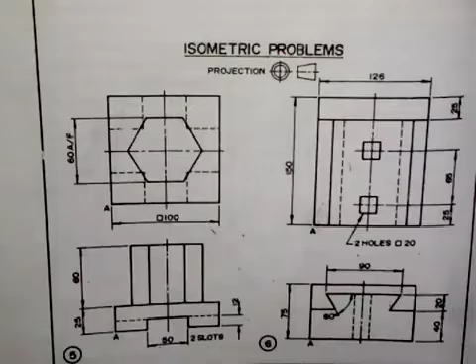Alright, here we are still working on isometric problems, and here I will be showing you how you can construct this, how you can produce the isometric view of this object. And actually, the book I'm holding is Engineering Drawing 1, Pickup and Parker, and I'm on page 166.

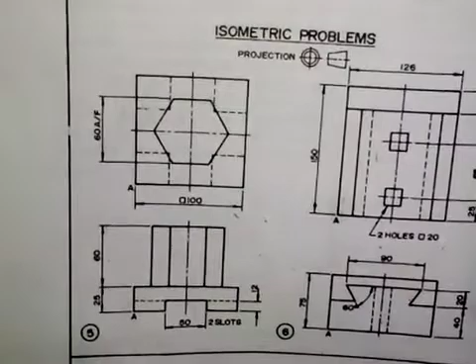And here we have these orthographic views. They are given in third angle projection. It means that for this object that I said I want to produce its isometric view, we have this is the front elevation, and this is the plan or the top view, and this is the front view. Okay. As I said, we want to produce the isometric view of this object, and looking at what we have here, let's talk about the dimensions.

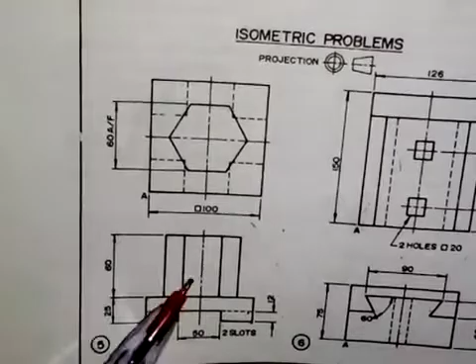So we have in the front elevation, distance from here to here is 12 millimeters, and distance from here to here is 50 millimeters, and then for this distance from here to here is 25 millimeters, and the height of this is 60 millimeters. And if you look at what we have here, this is a hexagonal prism placed on this body. Okay, then coming to the plan, for this hexagon that we have here, the distance across flat is 60 millimeters, and distance from here to here is 100 millimeters.

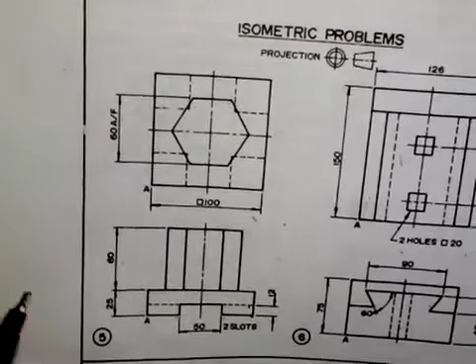So for this base, we have two slots as it is written here. There are two slots, and distance from here to here is 50 millimeters. So that means we have one on this side and one on this side. As you can see here, it is hidden here. So first of all, the first thing I'm going to do is to produce the base. And the base is in form of a square. So I will produce that and you will see it right now. So let's work on that.

So the first thing that you need to do here is to draw a horizontal line. So we draw a horizontal line like this, and we take our set square. Okay, so we take our set square, put it at this point, and we draw this line in this direction. Okay, and then we turn it to this side, and we draw this in this direction like this. Okay, so as we have done now,

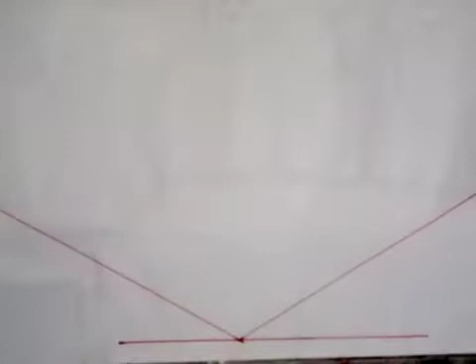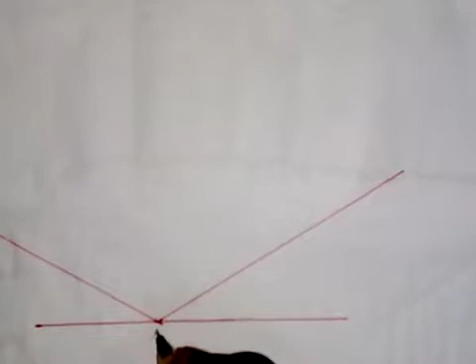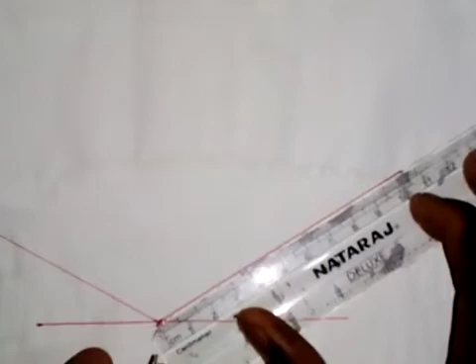looking at what we have here, we are told that this is point A here. So if point A is here, that means I have to take a measurement of 100 millimeters at this point. So this is 100 millimeters. And I also have to take 100 millimeters on this side, because this is a square. So this is 100 here.

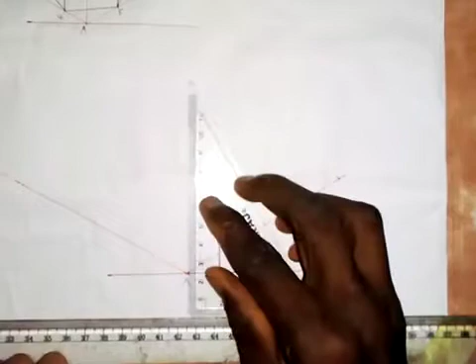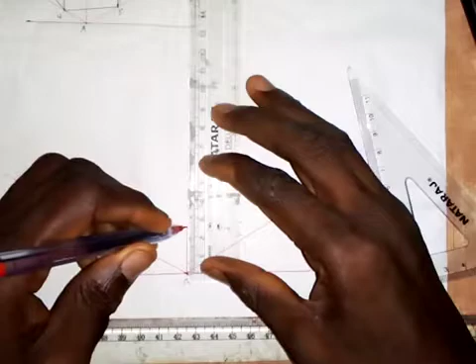So here I'm going to draw just a short vertical line at this point like this. And in the drawing, the distance from here to here is 25 millimeters. So here I will take a measurement of 25 millimeters. So this is 25 millimeters here. So here I will draw this line. Here also I will draw a vertical line, and I will come here also and draw a vertical line.

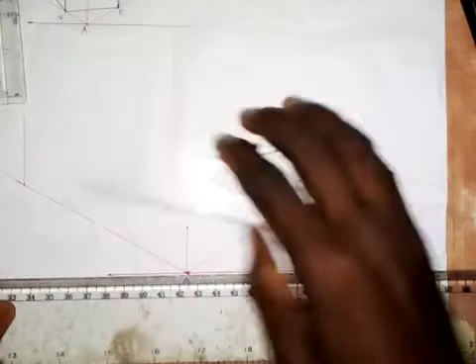So here I will transfer this to this side, and this also will be transferred to this side, and then here I will draw this. So take this to this side, and here I will transfer this to the other side. So this is it.

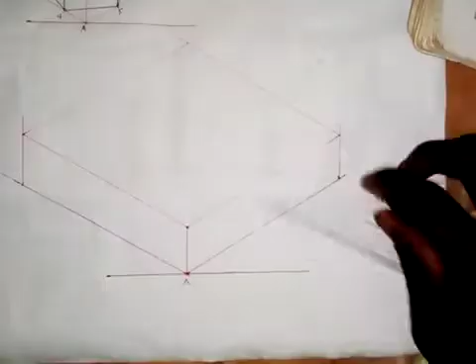Okay, now we are not done with the base, because we are told that we have slots here. We have a slot on this side, and we are told that we have two slots, so that means we also have it on this side. Since distance from here to here is 100 millimeters, I need to get the midpoint of the whole of the body, so I will divide 100 by 2, that is 50. So here I have 50, and from here I will take 25 to this side, as the length of the slot is 50 millimeters.

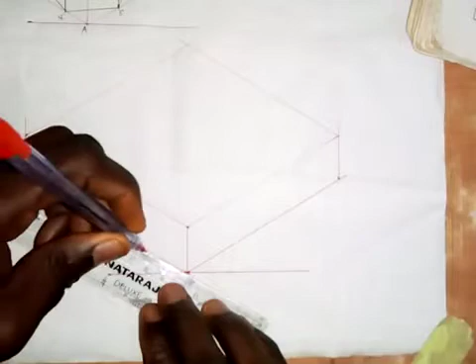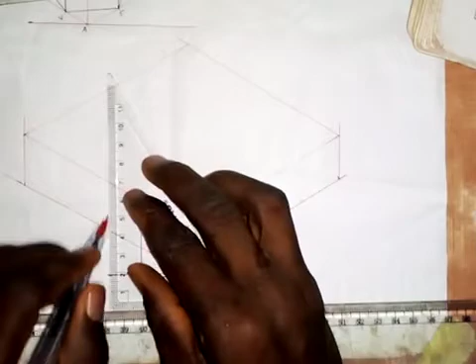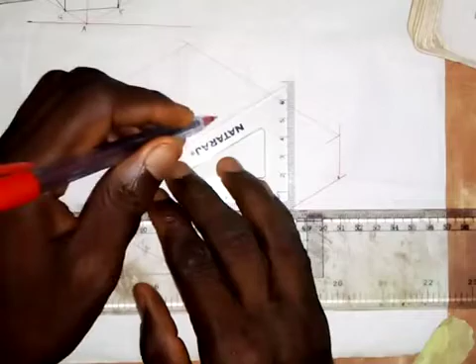I will come here also and get the midpoint of this. So this is 50 millimeters. I will take 25 to the right side and 25 to the left side. Okay, so with what I've done here, let's locate the center first. The center is very, very important. So I will draw the center with a short dashes line. I will also come here and do the same thing. So I will transfer this to the other end like this. I will also transfer this to the other end.

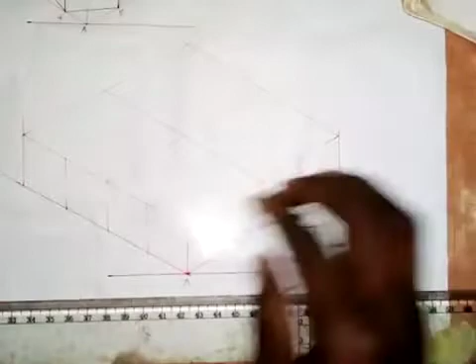Alright, so I've located the center. So the next thing I need to do here is to get the slot drawn. So here I will draw a vertical line. Here also I will draw a vertical line. Here I will also draw a vertical line at this point, and here also I will draw a vertical line at this point. Then at this point, I will draw a line in this direction, and here also I will draw a line in this direction to this side.

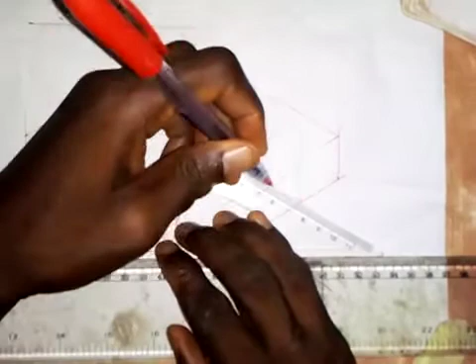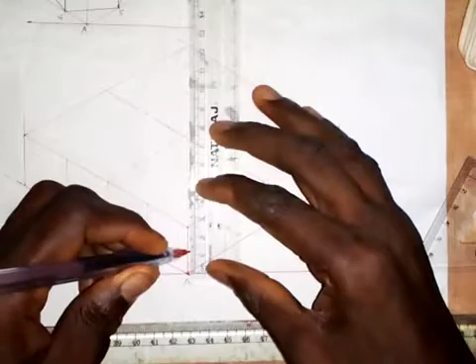Okay, so with what I've done here, what is the height or the distance from here to here? The distance from here to here is 12, as we are told there. So I will take a measurement of 12 millimeters on this line. So this is 12 millimeters here. So here I will transfer this to this side like this, and here also I will transfer it to this side like this. Okay, so looking at what we have here, we have the base in place, we have the slot in place. So let's leave it for now.

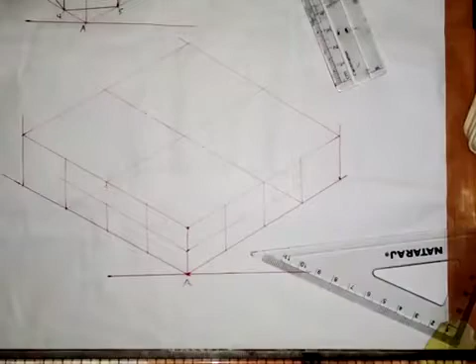So the next thing that we are going to do is to produce the prism that is placed here. To produce the prism, we are given distance across flat. So distance across flat is 60 millimeters. So what I'm going to do is construct. I will come here, and I'm going to use this part. So for you to be able to see what I want to do here, I need to construct a hexagon using the distance across flat. I've done a video on that, so all you need to do is to watch the video. But if you have not watched the video, I'm going to do it here for you to understand.

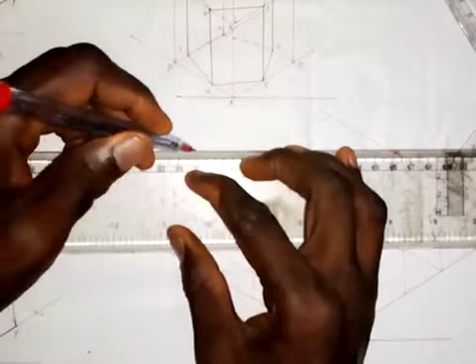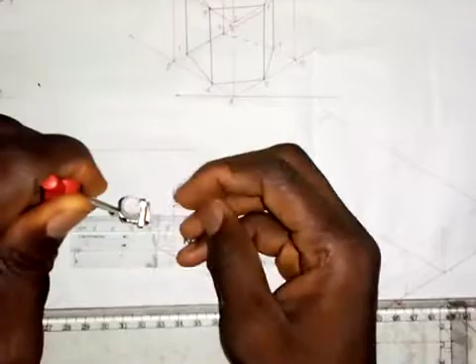So I will draw a horizontal line here like this. With this horizontal line that I've drawn, the next thing I'm going to do is to take my compass and draw a circle here. All right, so here I will take a measurement of 30 millimeters as the radius, as the distance across flat, as we are told here, is 60 millimeters. So I just take a measurement of 30 millimeters. So as I've taken it here now, this is 30 millimeters. I'll put it somewhere here, and I will draw a circle like this.

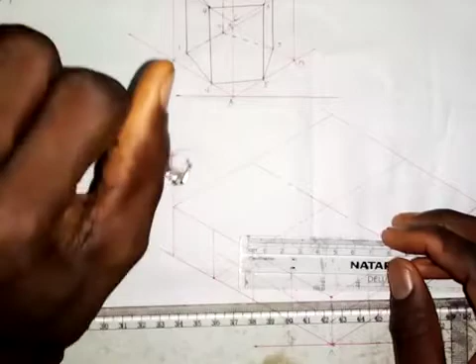So with this circle that I've drawn, the next thing I'm going to do is come to this point here. It is distance across flat that we are given, so we construct in this form. You draw a horizontal line at this point, that's the tangent to the circle. You also draw a horizontal line at this point like this. Then you take your set square and set it at this point. You set it like this, and you draw a tangent to this part here like this, and also bring it to this point like this, and you draw a tangent to this like this.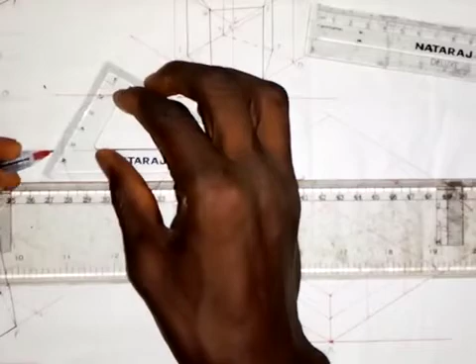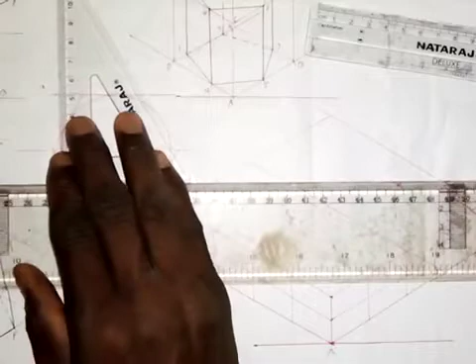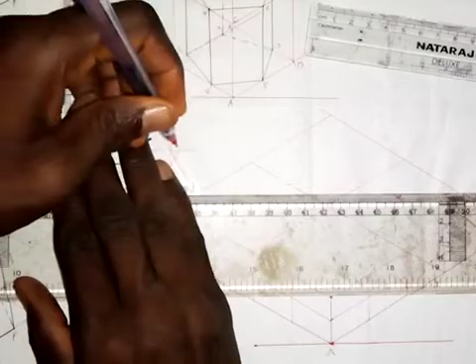Then if I set it like this, I will draw a tangent to this point like this, and then bringing it here like this, I also draw a tangent to this. Okay, so I draw like this. Looking at what we have here, all I need to do is make this thick. So make this a thick line from here to here. I also make this a thick line from here to here, and this a thick line from here to here. So this will also be a thick line.

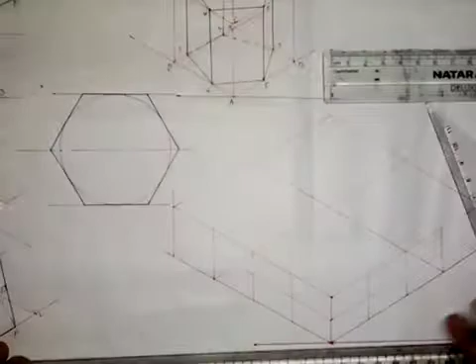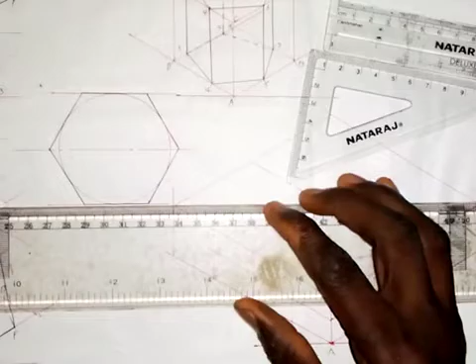And this will also be made a thick line for the hexagon to come out, for us to be able to see the hexagon. So this is it, we are drawing the hexagon. By drawing a line from here to here, the distance from here to here is known as distance across flat. I believe you understand that. Okay, so the next thing that I'm going to do here is draw. I can just use one part, because I don't want the line to cross this object. So I will draw a vertical line.

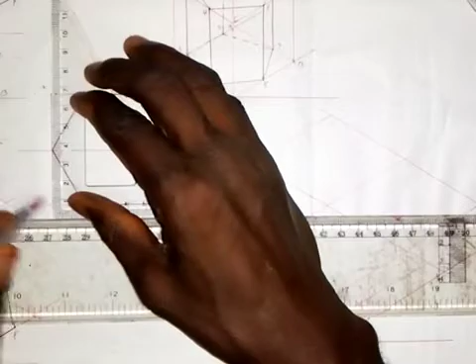Draw a vertical line here. I draw a vertical line here, and I don't want it to cross this, so I can make use of this part alone. So what I want to do is that if I draw around this, I'm going to get something like that, a square. Yeah, that would give me a square. That's what I want to get here.

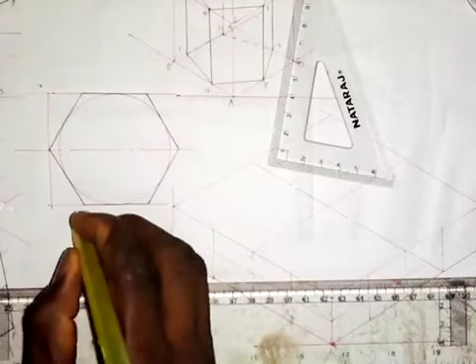But before that, let me label this. So if this is A, or let me draw it. So let me draw it. If it crosses it, I'm doing it with a thin continuous line with my red pen. So if it crosses it, I don't really need it. So I draw this like this, and I will draw this horizontal.

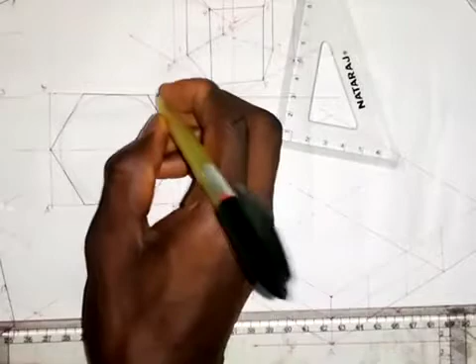Okay, so this is point A and this is point B here. This is point B, so don't mind that. So this is point C here, and this is point D. So here I will label this. This is 1, this is 2, this is 3, this is 4, this is 5, and this is 6.

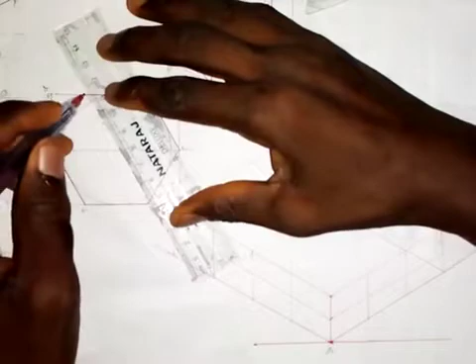So I will need to connect these corners. So connect this like this. I will also connect these corners like this. Okay, so with what I've done here, I will take this distance from A to the center, like this. So I'll put it here in the center.

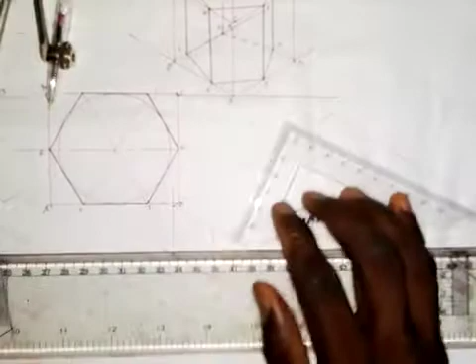Now I make an arc here like this. For this, I'll put at this point and extend it to this point here like this. So I make an arc here and here like this. Okay, so looking at what we have here, I will form the shape. I found that it's not a square. So I will draw this here like this and bring it here.

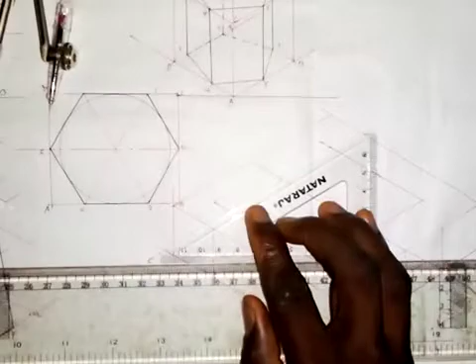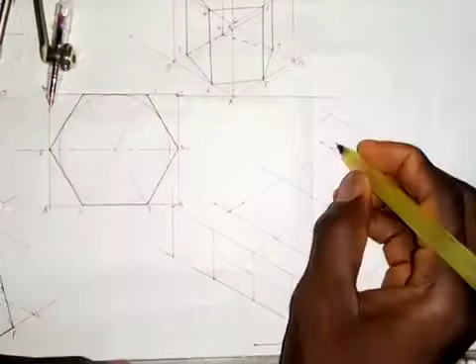I will draw this like this, and then I will turn it here and I will draw. Okay, so coming here also, I will draw it here like this. So looking at what we have here, this is point A, this is point B, this is point C, and this is point D. So we need to locate the numberings.

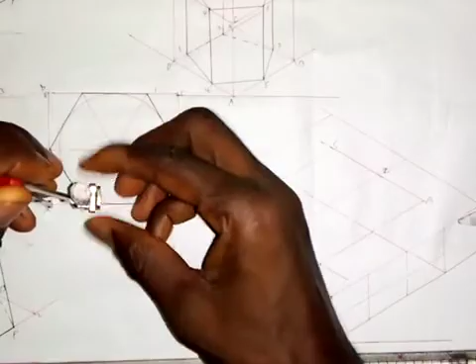Okay, so looking at what I have here, this is 5 here, and this is 2. So we need to locate other points. To locate 4, I only need to take one. So I put at this point and make an arc here like this. I put it at this point here and make an arc, and I put at point C here, make an arc here, and I put at point D here, and make an arc.

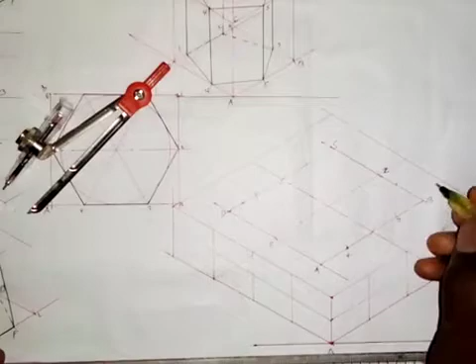So looking at what we have here, this is point 4, and, sorry, okay, I'm supposed to do this here. So this is point 3. Okay, so this is point 1, and, okay, I'm supposed to put 6 here, so this is point 6. All right, so we have all the points in place.

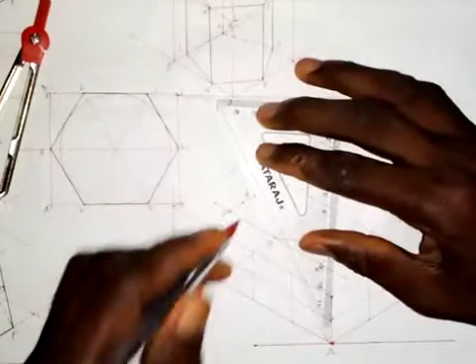So first of all, I join this together. I will connect this together with this, and this goes together with this, and this goes together with this. So looking at what we have here, I only need a little part, because it's an isometric object, I'm not going to see everything.

So this line will be a thick line from here to here. This will be a thick line, and this will be a thick line from here to here. And this will also be a thick line from here to here, and this is going to be hidden. I can't see this one. This will be hidden. Let me show it so that you see it. And this will also be hidden.

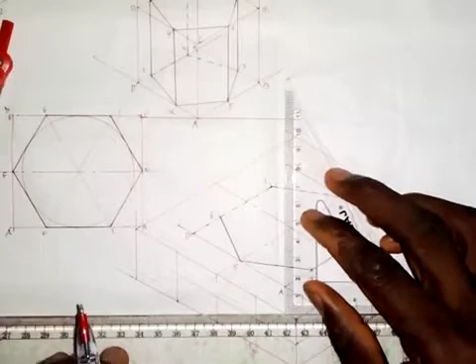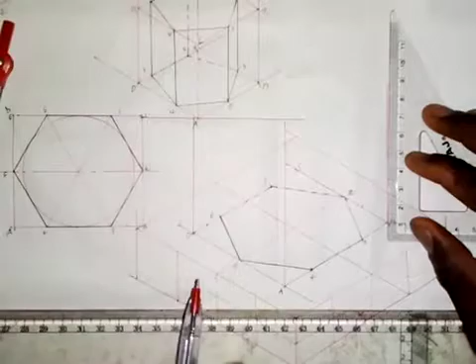And then the next thing that we need to do, for us to produce the complete hexagonal prism on top of this base, we need to transfer this up. At this point you draw this up like this, and then you come to this point, so you also draw a vertical line here like this. And then we take a measurement of 60 millimeters. If I take 60 millimeters from here, it's probably going to enter this thing. Okay, so this is 60 millimeters.

I believe you can see what I'm doing, so don't mind my paper. Okay, so now I'll transfer this to this side, and this. This will also be transferred to this side like this, and I will need to draw this to this side. Okay, so this goes to this side from here, and then I will draw this to this side like this.

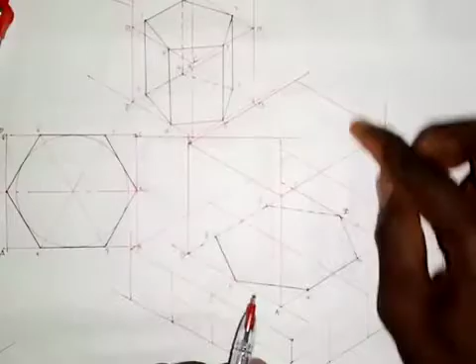Looking at what we have here, what I need to do is to transfer this point to here. This point I'll transfer here, this I'll transfer here. So here I will draw a vertical line from here. Let me make it bold so that we can see what we want to do. Here also I will transfer from here. Okay, so we can see what we are doing now.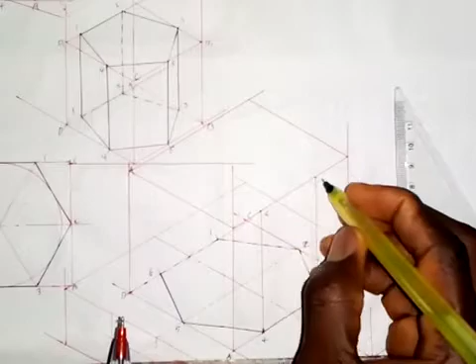Here we have point 4. This is point 4 here, and this is point 3 here. Then we take point 2. Point 2 goes up like this. So this is point 2, and here we transfer point 1. So this is point 1 here, and here we also transfer point 6 to this point here.

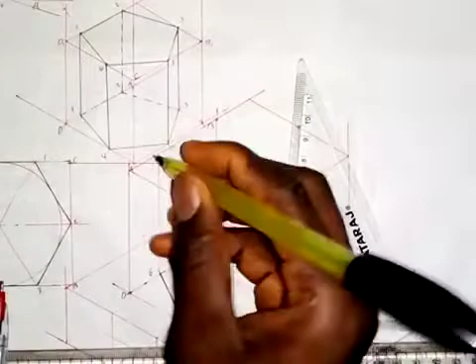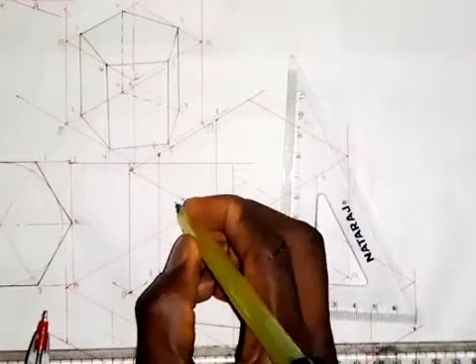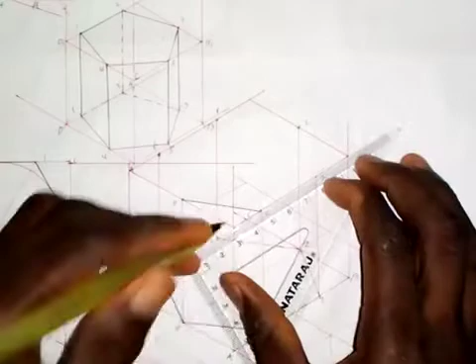So here is point 6, and also point 5. It goes on this line. So here is point 5. All the points have been obtained. The next thing that we need to do is to join them together. I will join 4 and 5 together. This is 4, 5. I will join 3 and 4 together like this.

Don't forget that we are going to see the upper hexagon, so we are going to see everything about it. Now we join 2 and 1 together like this. Then I will join 1 and 6 together like this. Then I will join 5 and 6 together to see the upper hexagon. So this is it. I believe you can see it.

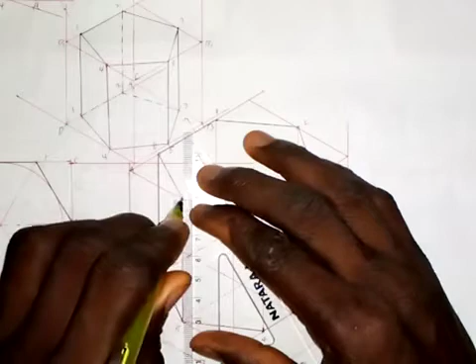The next thing I'm going to do is connect 6 to 6 together. That will be a thick line, since I can see this line. And I will connect 5 to 5 together. I can see this line, so it is a thick line. I will also connect 4 to 4 together. It's also a thick line; I can see this line. And I will connect 3 to 3 together. It's a thick line also.

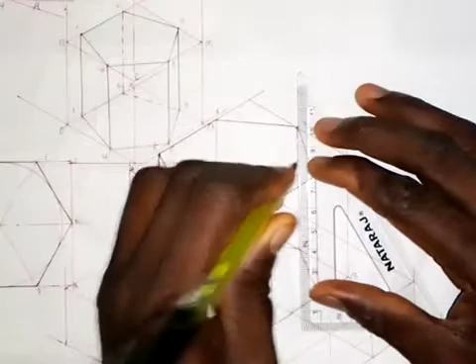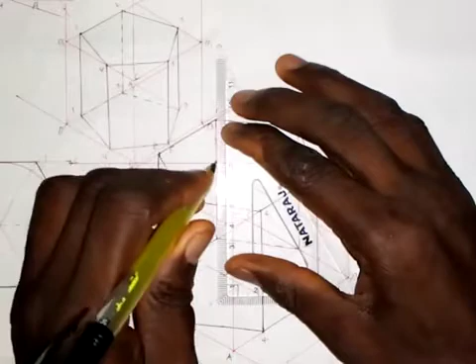But this will be hidden, so I will draw it with a short dashes line like this. Okay, this is also hidden. So there it is. I believe you can see what I've done here. The next thing I'm going to do is to bring out the shape of the base.

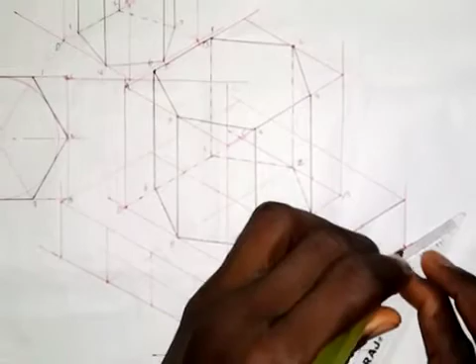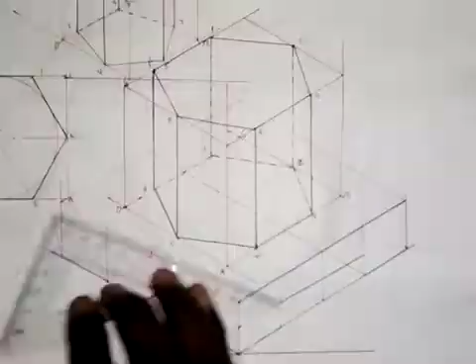I made this a thick line from here to here, and this is also a thick line from here to here, and from here to here is a thick line, and from here to here is also a thick line. Then for this part, from here to here is a thick line, and from here to here is a thick line. This line is not okay. I just see it now.

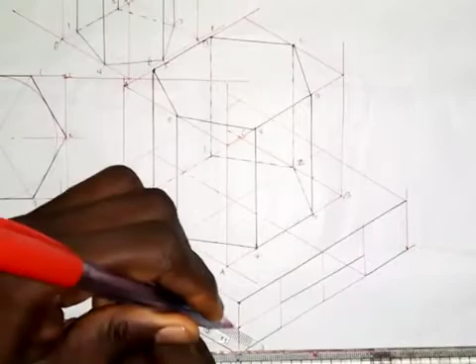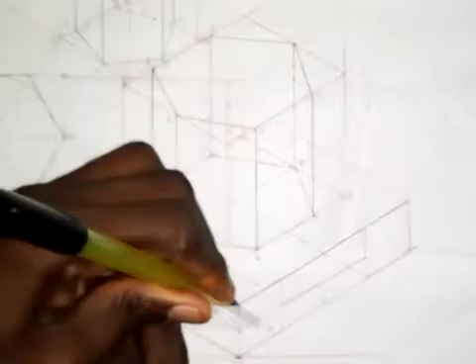Okay, then from here to here is a thick line, and from here to here it's also a thick line. All right, here also I made this a thick line. From here to here is a thick line. From here to here is a thick line, and this is also a thick line from here to here, and from here to here is a thick line.

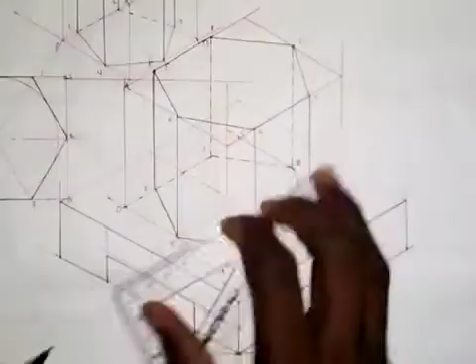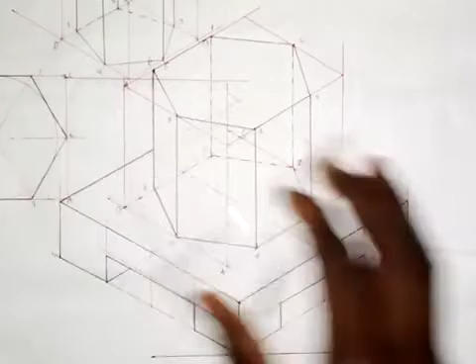This is also a thick line from here to here, and this is also a thick line from here to here. So this line will be drawn thick. This line also is a thick line, to show that it's a slot. And then I will draw from here. From here to here is a thick line, and this also goes like this.

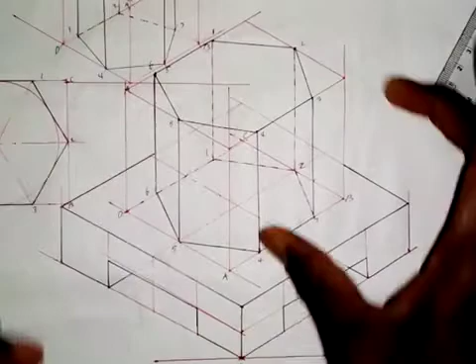Looking at what we have done here, the object has come out, and this is how it will look. Don't mind these ones here. So this is the object. We have this base, and we place a hexagonal prism on it. It's as simple as I've shown it here. All you need to do is practice, and when you practice, you will surely master it. Don't forget, keep on practicing.